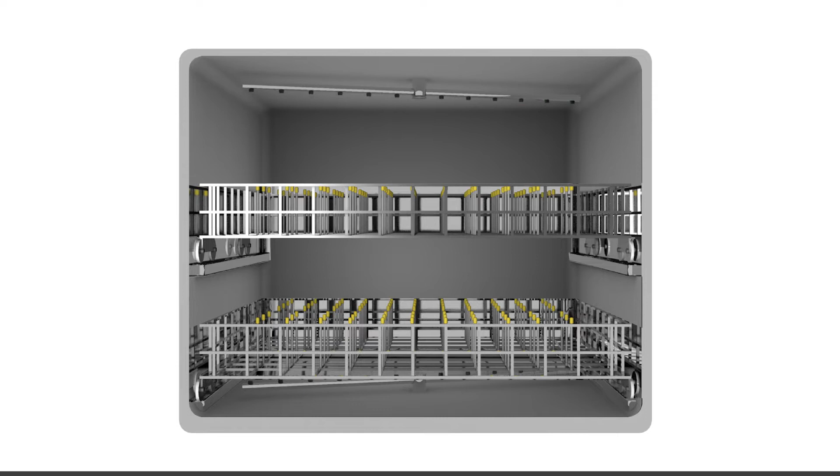One-chamber batch systems consist of a cleaning chamber in which the boards to be cleaned are placed in one or more baskets and cleaned and rinsed by several spray arms. In most cases, the spray arms are located above and below the baskets, which means on the floor and the ceiling of the chamber.

However, there are also systems with additional arms on the sides to the right and left of the baskets. Depending on the machine configuration, the baskets are fixed and the spray arms are moving, or the spray arms are rigid while the basket is moving. The throughput, thus the number of cleaned assemblies in a defined period of time, is an important parameter of a system. In one-chamber batch systems, the throughput depends on the placement density in the basket. High density and thus high placement also means higher throughput per batch.

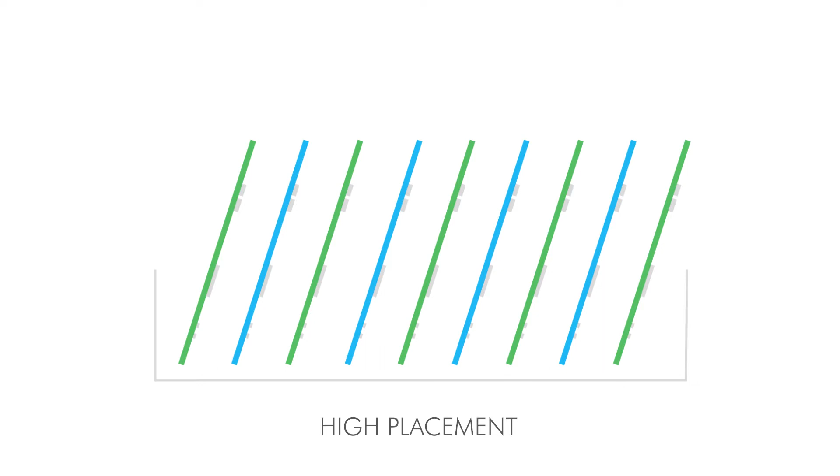The more densely the system is loaded, the higher the probability that the assemblies will cover each other. This phenomenon is called shadowing. Usually, the substrates come into contact with the cleaning agent from above and below, or from two sides. This means that never all directions and angles get covered by the cleaning agent.

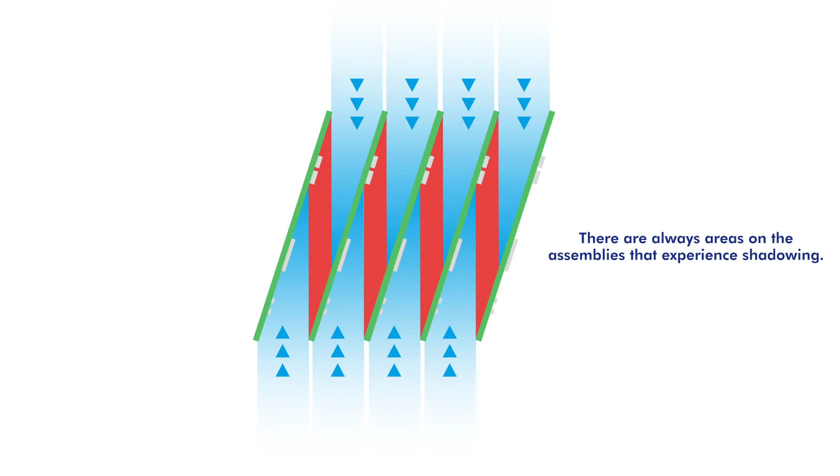In addition, it can happen that individual larger components on the PCBA lead to shadowing in specific areas on the board. This would mean that there are always areas on the assembly that experience shadowing, and the cleaning result would be worse in these areas, respectively, that a longer cleaning time would be required to achieve good results.

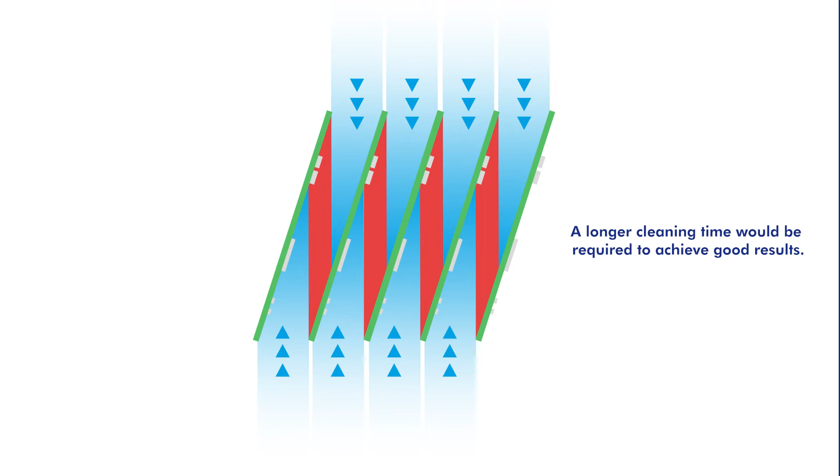What if this myth was true? Would it mean that there are always shadowing effects on the boards when the machine is fully loaded? That a certain area on an assembly sees less cleaning agent than the rest of the board because it's covered by surrounding assemblies and located in their spray shadow? And if this was true, would it influence the cleaning performance? And could shadowing effects be avoided by different machine configurations?

We scientifically checked this myth. We selected a typical batch system with a rigid basket and moving arms, and a system with a moving basket and rigid, non-moving arms, and carried out comparative tests. Both systems are widely used in the industry for lower volume cleaning applications. We have used a glass test board equipped with components of different standoffs and contaminated with a defined test flux in order to test the cleaning performance under components.

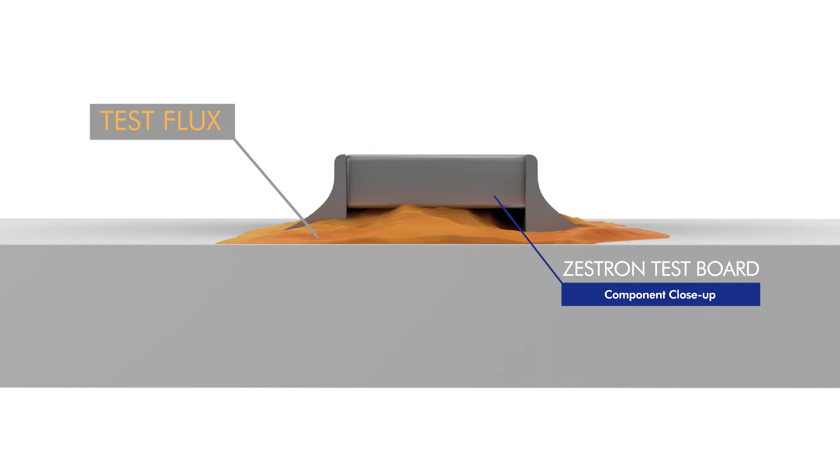In a first step, we carried out cleaning tests with so-called empty runs in both systems. For this, we only placed a few of our test boards at different positions in the system. This allowed us to define the cleaning performance without any shadowing risk caused by other substrates. In the second step, we fully loaded both systems, each with two baskets, one on top, one on the bottom, and thus reproduced the usually desired maximum throughput in production.

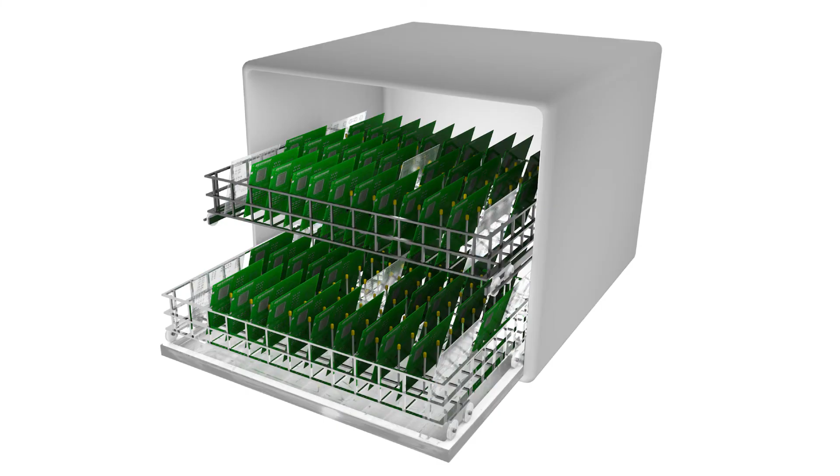We again positioned our test boards in the same places as during the empty runs and loaded the rest of the baskets with standard boards of the same size to allow for potential shadowing. Several test series were run with both systems empty, only loaded with the test boards, as well as fully loaded with the test boards and other assemblies. To find out whether shadowing actually occurs, the cleaning results under different components on the test boards of the empty runs without any shadowing were compared with the test boards of the fully loaded tests.

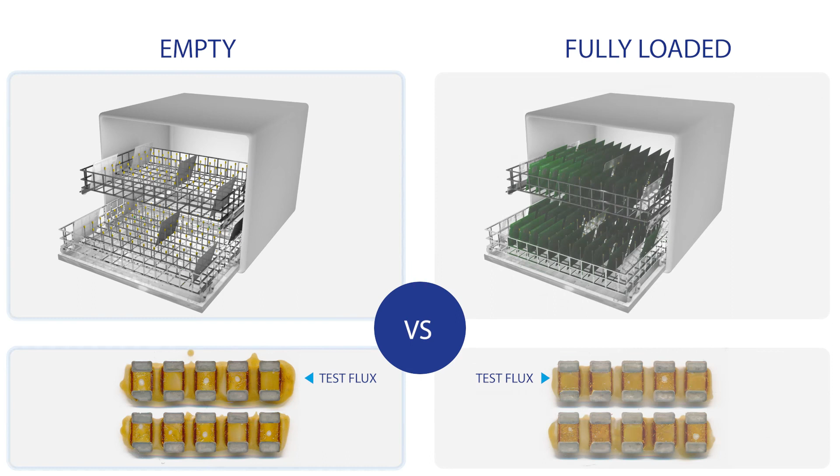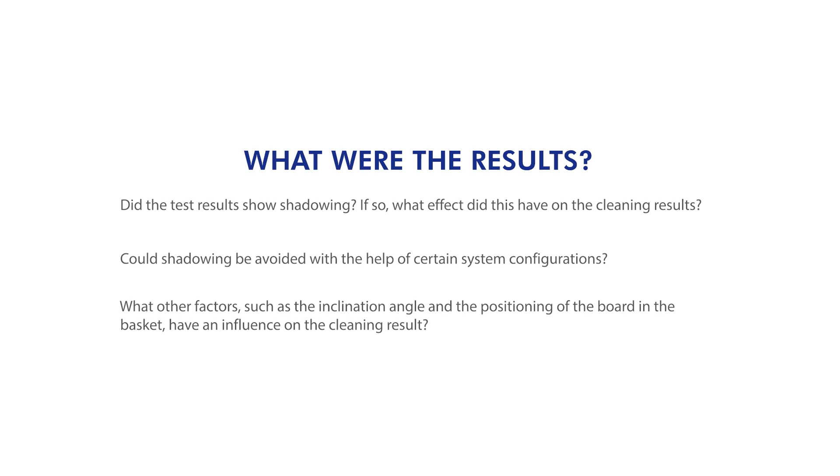What were the results? Did the test results prove any shadowing? And if so, what effect did this have on the cleaning results? Could shadowing be avoided with the help of certain system configurations? And which other factors, such as the inclination angle and the board's positioning in the basket, have an influence on the cleaning result?